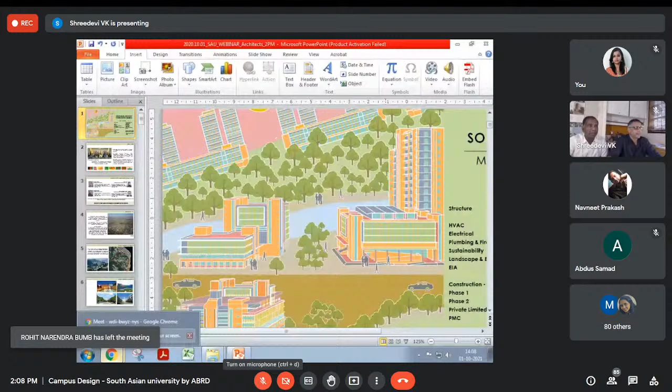Okay, can you all hear us now? Yes, yes, yes sir. Okay, great. Thank you. Good afternoon everybody. Good afternoon students, faculty members, and other guests who are joining online.

So we are here to present a project that we've been working on from 2011 onwards. We'll come to the dashboard as we go along with the presentation. The project is for South Asian University, located in Maidangarhi village in New Delhi.

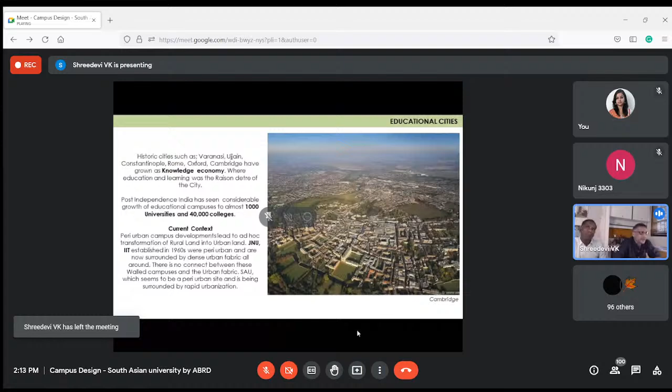We have been in the domain of institutions and educational campuses for almost the last 15 years. We started our practice in 2001. We did the Alliance Française, an educational institution of a different nature. Then we did the National Center for Biological Sciences, another educational-cum-research and development center. And then we came to South Asian University.

It has been acquired learning over the years, where we've been studying institutions and campuses, and we are taking you through some examples of campuses existing around the world to put things in perspective and understand how campuses are located within cities, peri-urban areas, or absolutely rural areas in some cases. Historic cities such as Varanasi, Ujjain, Constantinople, Rome, Oxford, Cambridge were known as knowledge economies, where education and learning was the raison d'être of the city.

Post-independence has seen considerable growth of educational campuses, to almost 1,000 universities and 40,000 colleges in India. We are still way behind what we really need. So this is going to always be a thrust area for our country, because the entire demand for education, particularly higher education, is so much that the sheer numbers will really put a lot of thrust on this sector of educational development.

In terms of context, you'll find all across the world peri-urban campus development leading to ad hoc transformations of rural land into urban land. A case in point is JNU and IIT, established in the 1960s, which were really peri-urban to start with.

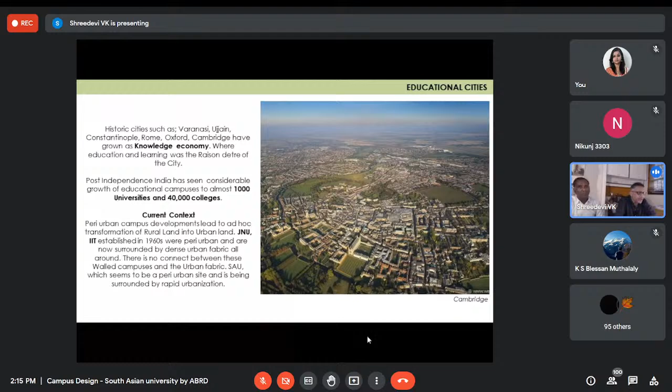But they have now got surrounded by urban fabric all around. One doesn't realize that at some point they were so far outside the city. What's notable is there's no real connect with the rest of the city, and over the years, particularly with security and other concerns, these have become very insulated and isolated campuses.

As a build-up to our project, we went through lots of universities, not only through case studies on the net and literature study, but we also physically visited several universities, particularly in Hong Kong, Shenzhen, and different parts of China.

This was an example of the Chinese University of Hong Kong, which is again located pretty much outside Hong Kong. You see a lot of buildings now, but when it was built in the 60s, it was almost like a verdant green area located on mountain slopes overlooking the sea.

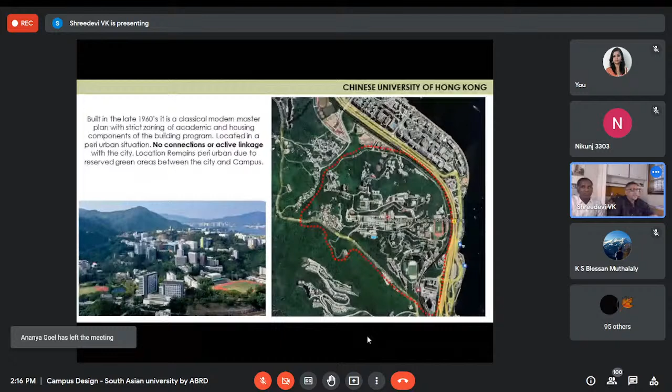The fact that campuses are isolated is not something new to India, but happens all across the country, and indeed all across the world. Even though the landscape here is stunning and you can see across the city, there are no real connections or active linkages with the city.

Some examples of how developments have continued in universities, where you can see modern buildings made in the 60s and 70s on the lower side, and new developments, new typologies and new building materials and building types coming into play over the years.

Another university was Hong Kong University of Science and Technology, again located slightly outside Hong Kong. It was a very interesting campus because it was very compact, located on steep topographical land overlooking the sea. This is the difference between universities where the context is not so scenic versus this one, which had a very strong visual linkage as well as compact development, visible in the built environment on that side.

This is a view of the university from the oceanfront. You can see how it integrates into the sea body. The academic buildings and all the faculties are located on the higher ground profile, while all the housing is on the lower ends of the campus, closer to the port station, the jetty back, etc. It is all located close to the ocean.

Studies of universities also looked at Boston, and all these universities are very different from where they used to be located.

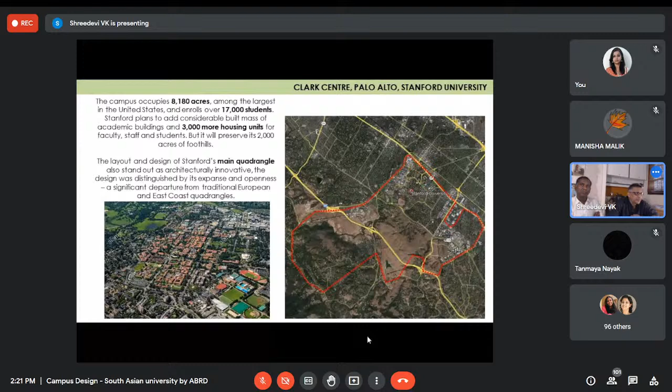That's the main building of Stanford University, the main quadrangle where you enter. You have very classical buildings which were built at least about 125 years back, through a master plan done by Olmsted in 1888.

And on the right, you can see newer development, which continues to redefine the character of the university, and impart to it a new character and a new kind of feel. So one of the projects we looked at in much greater detail when designing the National Center for Biological Sciences was the Science and Engineering Quad.

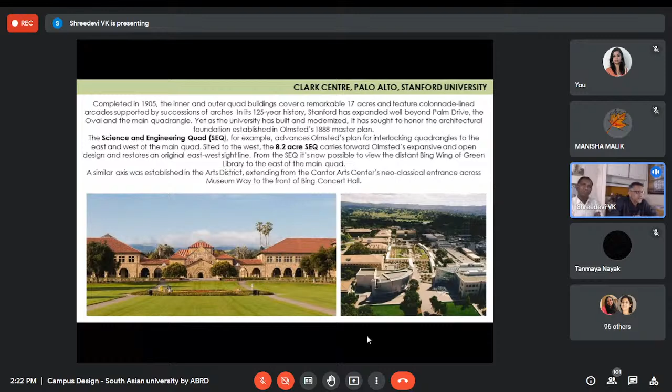The idea of this development was how the university can enhance and focus more on interaction, bringing people together from different parts of a large campus.

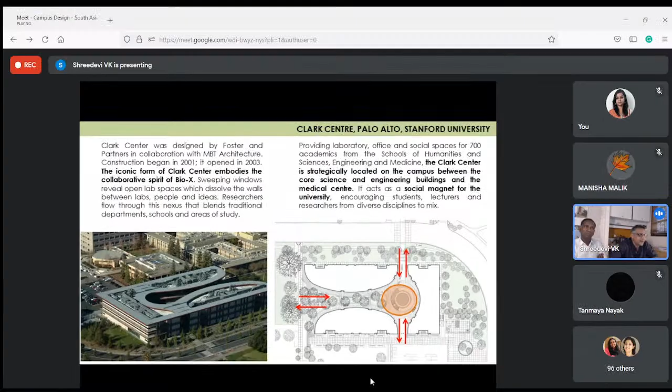This was a building we looked at much in detail, the Clark Center, developed under a program called Bio-X. The whole idea was to make a multidisciplinary hub in the 21st century, where people come together, are able to meet each other, and the research and program that develops here is visible to people moving through the campus.

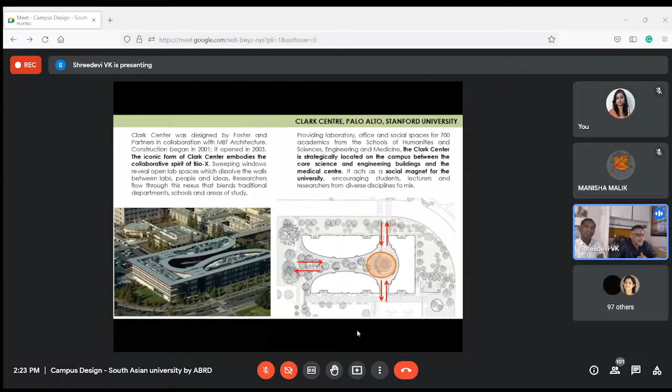You can see the diagram on the right. It shows the entire building is conceived as 3 blocks so that it invites people from all directions, and the central space becomes a space for meeting.

The entire ground floor is an activated space, with a large cafeteria and 2 multidisciplinary laboratories. The idea was that research becomes visible. While you walk through the center, you can see very advanced robotics research in one laboratory, and high-end life sciences research in another. So every person who passes through the building gets to experience what's happening inside.

This is a great example of how they've activated the entire campus through an intervention that's really not very big, but small. The oval shape you see is an open air and underground theater, where supposedly everybody can meet, host events, and have cultural events. This is the kind of thought now really prevalent in university campuses.

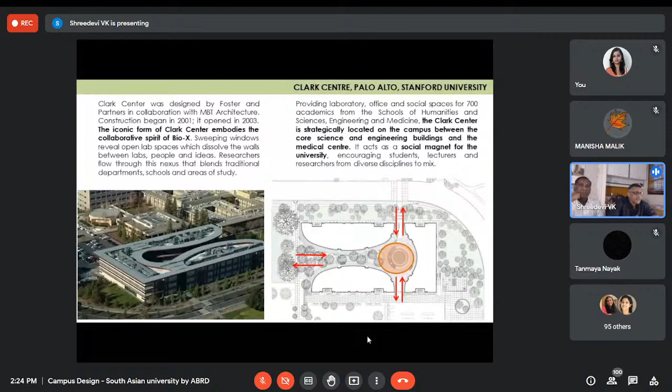It's multidisciplinary research, so you can have a robotics person working with a life sciences person, working with a chemistry person. Everyone is invited to be part of this program and conduct research in a very open and visible environment.

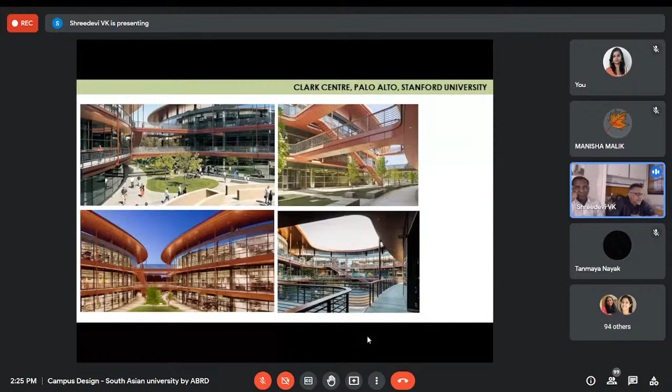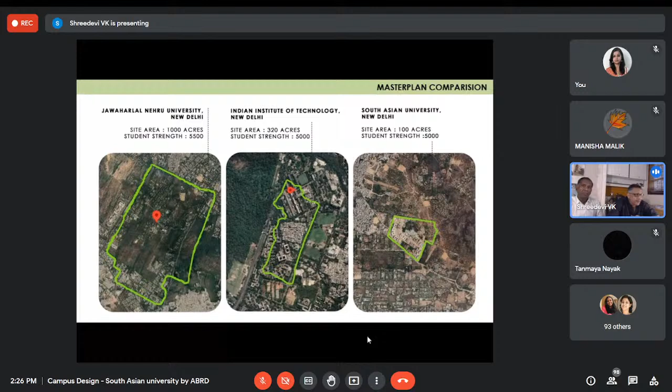Back in the 60s when JNU was developed, it was a 1,000-acre campus envisaged for a student strength of 5,500. Indian Institute of Technology had a site area of 320 acres for 5,000. But South Asian University, on the right, at the same scale, is a 100-acre campus for 5,000 students. So you can see the transition of how densities are being compressed and land is becoming a precious resource, and things are really getting squeezed down.

So Rajesh will take over from here and run you through the entire competition, our concept, and where we are in terms of the project.

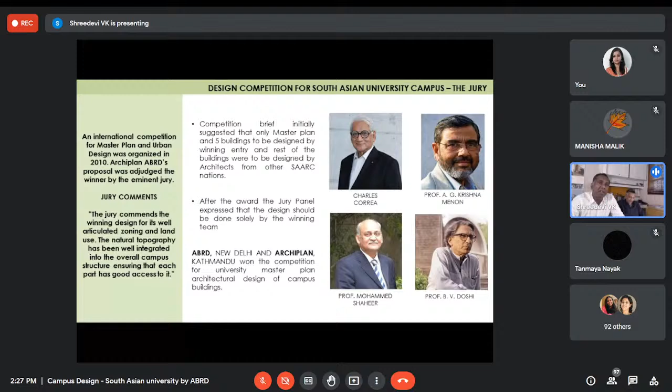The main reason our team got selected, as you can see in the jury comment, was that the jury commended the design on its well-articulated zoning and land use, and appreciated that the natural topography was very well integrated into the university functions and campus structure.

In fact, one of the edges of the sanctuary abuts our site. The edges towards the west and south of our plot are typical houses and a village called Rajpur Khurd. So it was a kind of context we had to imagine for this site, what it would be over the years, and then we responded to those edges.

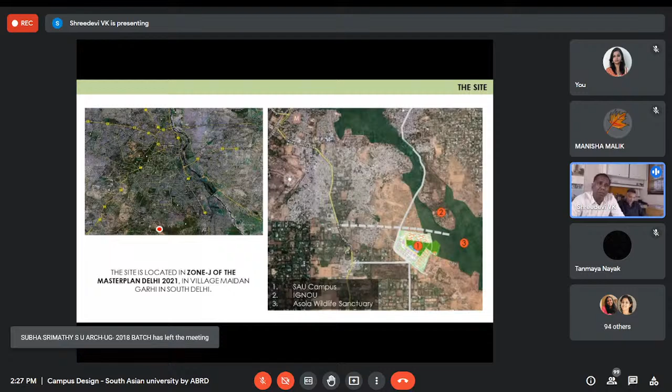Here you can see a close-up map. There is a 100-meter wide master plan road proposed on the northern side of the site. But as we understood during the design process, this road is very unlikely to come up, because it could pass through wildlife areas. The road would extend towards the main road and all around the campus, expanding to a 30-meter width on our southern side, which means a lot of impact on the blocks.

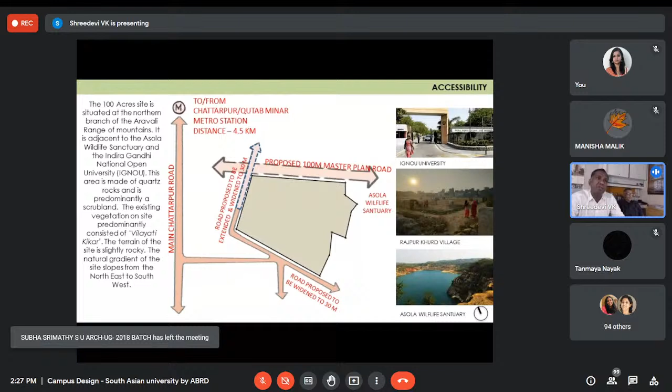Almost 90% of the year's rainfall comes in two months. This leads to conservation of water and very sensitive usage of that water through the rest of the year. This became an important part of our sustainability strategy, reuse of water, and in fact designing the scheme around water channels and drainage patterns became the main determinant of the design.

The second thing we realized was making this design very eco-sensitive and sustainable. Some principles we came up with were to make the built form very dense, which would help us consolidate very large open spaces.

Another thing we realized from traditional South Asian architecture was interconnections and linkages between various functions, and how these connections and linkages lead to creation of different types of vistas, giving users multiple options of circulation.

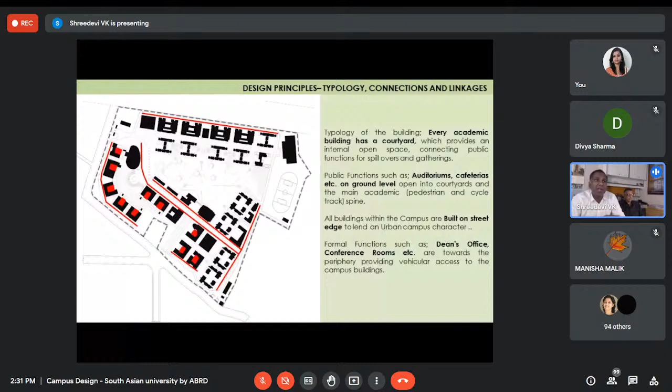Every academic building in our project came up with the idea of a courtyard. This building typology kept repeating because we have almost 14 faculties. Then there were buildings such as auditoriums and cafeterias located at the lower level, which would encourage a lot of public usage and free movement of people from these spaces within the building to the connector spines and to the pedestrian tracks.

One more design principle was that within the campus we kept all the buildings right on the street edge, which lent an urban character to all the buildings in the campus.

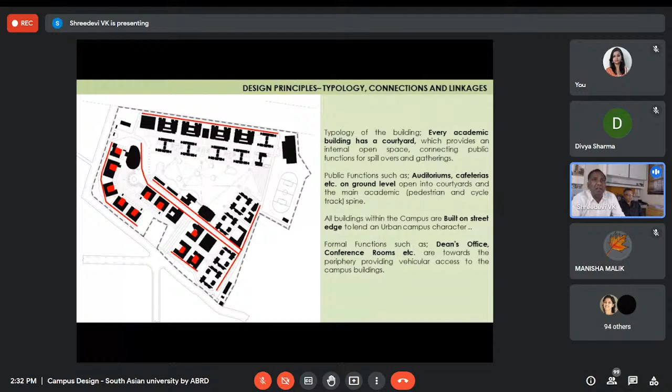Finally, coming to the vocabulary of architecture, we debated a lot and realized it would not be appropriate to follow any style or particular vocabulary. Rather, we kept our building facades, orientations, and fenestration to follow the tenets of climatic considerations.

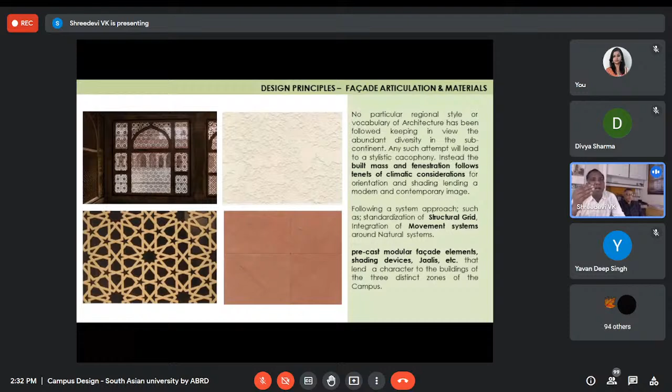The idea here was that the university is a fairly large program, with about 5,000 students living on campus, about 400 faculty houses, and an academic zone.

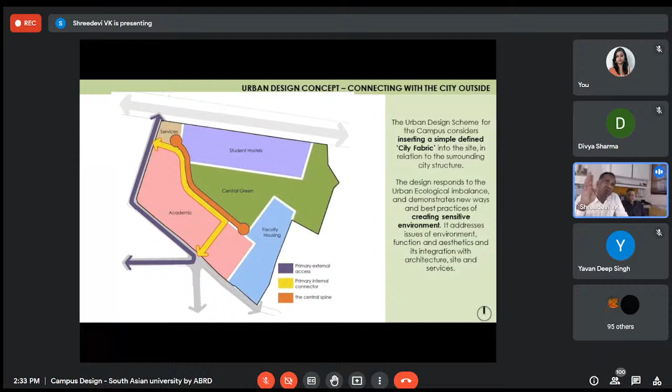As an approach, we created a very large central green, which was continuously linked to the Asola Wildlife Sanctuary on the eastern part of the site.

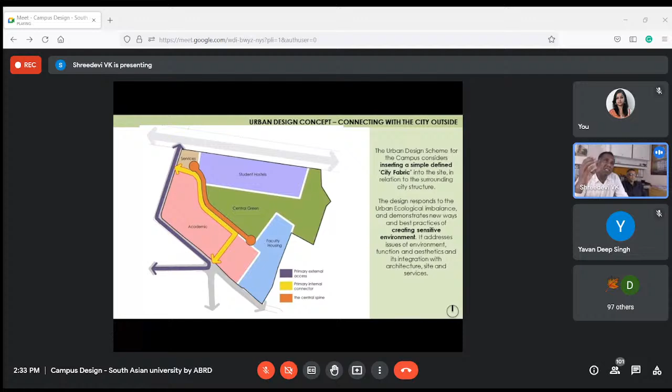The students' hostels were located towards the north, because that is the only area inaccessible to the public front of the city. Another reason for keeping the hostel there was that they would be least disturbed in that zone.

Faculty housing again was located in a part of the site which was not very visible, yet had an independent option of entry and exit. And the pink zone you see is the academic zone, where all the academic and administrative functions of the university were located.

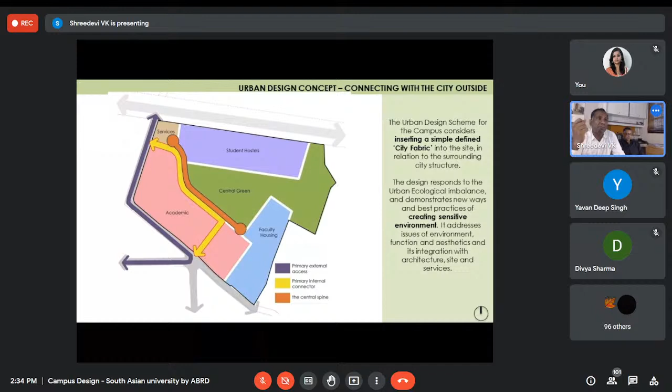Along with that came location of strategically locating our nodal points in each zone. So every hostel building, especially those facing the central green, has a very free-moving ground floor, with public functions like the hostel mess, dining halls, and gymnasium located at ground level. Similarly, in the academic zone, auditoriums and cafeterias are on the ground level. In the housing blocks, housing courtyards allow every housing unit its own intimate environment, opening out onto functions like the club and guest house.

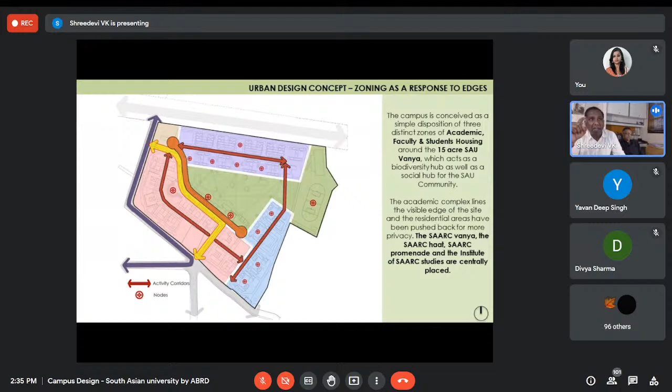Here you can see the bold red line, which is a connector spine between all three zones, and is non-vehicular in nature. The main yellow line is the motorable access way, where we envisage a public transportation vehicle coming into the campus, giving the option of taking a shared taxi or shared auto directly to the nearest metro station from within the campus.

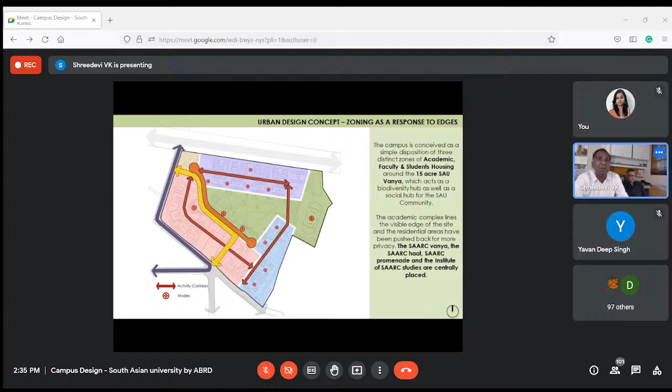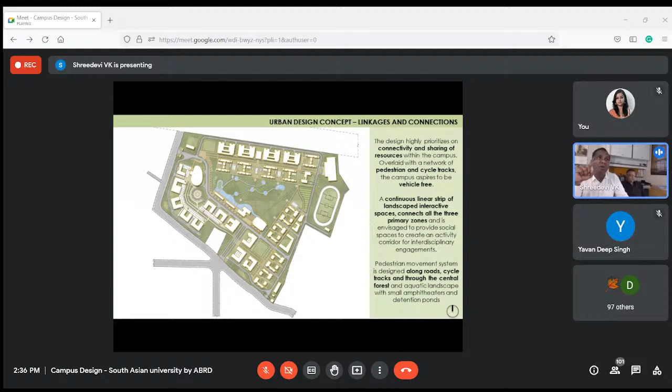So here you see the master plan, which we finally arrived at. It's a very complex web of connections and linkages. Every building or function is accessible by a cycle track, by a pedestrian walkway, and towards the periphery is the vehicular access. There is a continuous linear strip connecting all the buildings together with a pedestrian and cycle track.

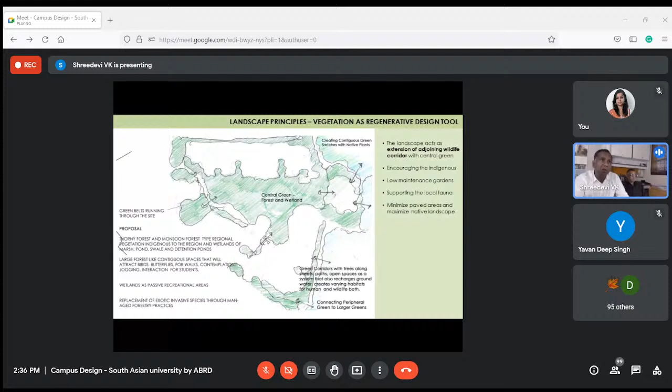These sketches by Akshay Kaul explain the prime determinant in locating the central green in the center of the campus: the hydrology. The highest point of the site is towards the northwest, and we collected all the water through a complex web of drainage channels into a rainwater harvesting pond in the center. As the landscape principle, our green areas came up along with these drainage channels.

The dark green shows where the 15-acre large central green is located, which we named SAU Vanya. The blue is where all the rainwater is going to be collected in the form of a rainwater harvesting pond.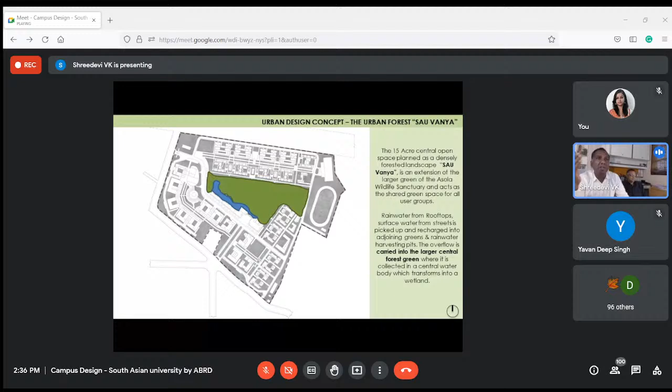These sketches indicate how the rainwater, even the roof water, is collected into rainwater harvesting channels. Instead of making these channels impervious, every rainwater channel is first connected into a small rainwater harvesting pit, and only the overflow of the pit goes into the stormwater drain and finally into the central collection pond. The idea is that a good content of moisture is retained in the ground where the buildings are located or exactly where the water falls. It follows the mantra: catch water where it falls.

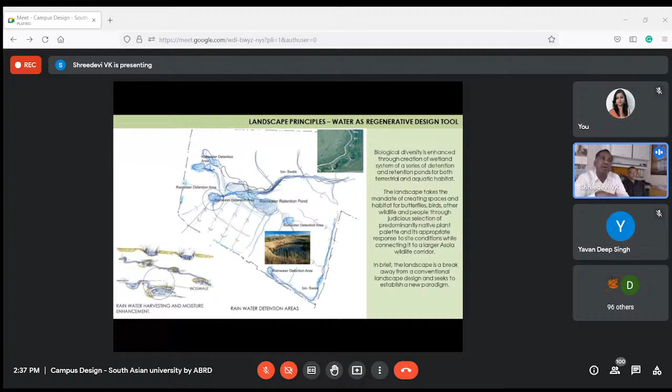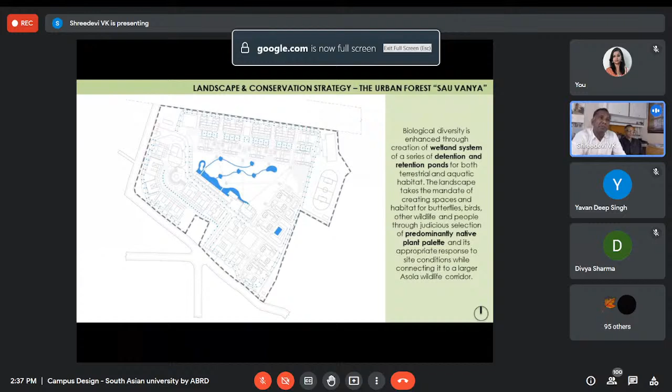So that's the final scheme. All the small blue dots you see are the rainwater harvesting pits we have created. This is a very unique scheme where we are going to have almost 1,000 rainwater harvesting pits throughout the site. We had to get this scheme approved by SDMC, the Jal Board, and many other agencies, and they all commended it as probably the first example of this being followed. Usually the norm is one rainwater harvesting pit per acre, or one tank for every 2 or 3 acres, whereas here we have almost 1,000 of them.

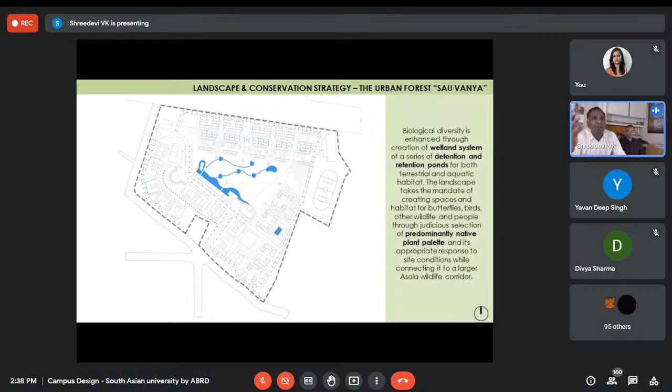These red lines indicate the vehicular circulation, which is towards the periphery. The smaller red lines are traffic that would be very low in movement, because the main roads are also at the back, and the ramp entries into the buildings are towards the back.

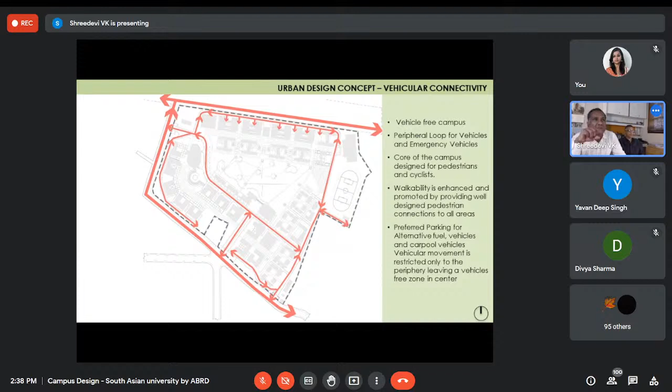These are the pedestrian networks and cycle tracks. You can see there are multiple options. If a student needs to walk from the hostel to an academic building, there is always the option of taking a shortcut through the Sau Vanya, or the option of cycling, shown by the big circular nodes connecting the buildings. Every building entry, especially towards the cycle track, would have cycle parking where they bring their cycles into designated parking lots and then access the building from there.

You can also see on the diagram on the left, the proposal has two-level parking structures proposed, which are within a 3 or 4 minute walking distance from every part of the campus. So in case we run out of parking spaces, the university can take up construction of these multi-level parking structures.

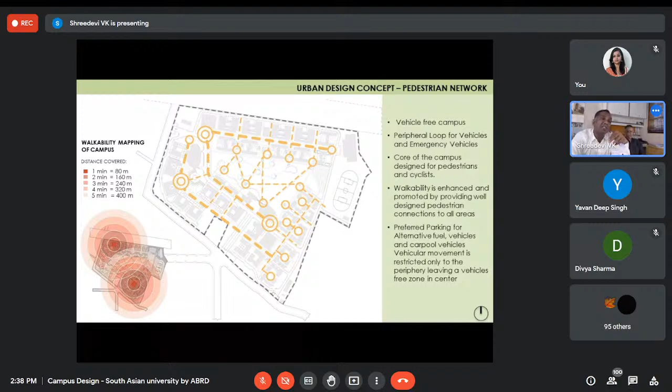The north-south patch is for 4 apartment blocks of 416 apartments for faculty and staff. Towards the east and south are the 12 faculty buildings located.

Apart from these zonings, we also proposed certain activity nodes, which were the major anchor points of the university. Overlooking the rainwater harvesting pond, we proposed the SAARC Haat, which would have eating joints from all 8 SAARC countries, allowing students, faculty, and even city dwellers to come experience the cuisine of South Asian countries. The space between the library and the SAARC Institute was the main SAARC Plaza, a sort of forum for the university, again overlooking the green.

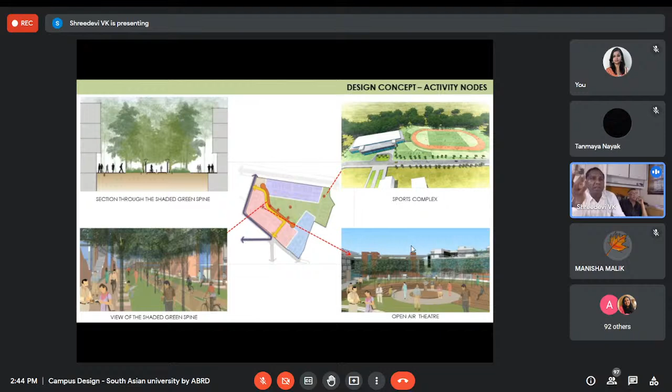So the next few slides will run through some diagrams or sketches we did during the design phase, showing how we arrived at the structure of the master plan.

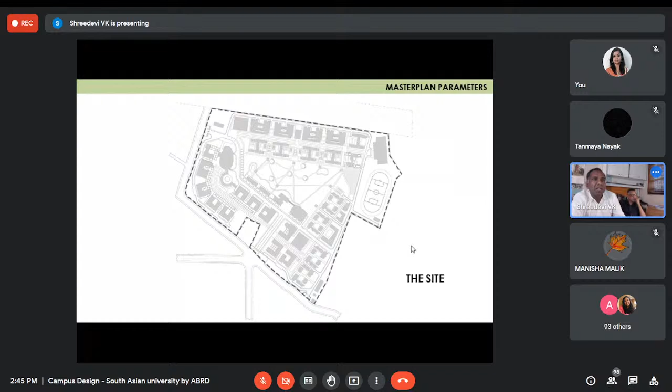The first idea was to locate our water features and how, through a system of swales, bioswales and check dams, to bring them into the central rainwater harvesting collecting lake.

Then came the built form, then the networks and circulations, and the vehicular circulation, which was kept to the periphery of the campus.

Then the plantation layer. Now, as Anupam mentioned, almost 50% of the university project has been completed and put to construction, and that's the academic zone you see.

Out of the 12 faculties, about 7 faculty buildings have already been built, and you see all the housing blocks.

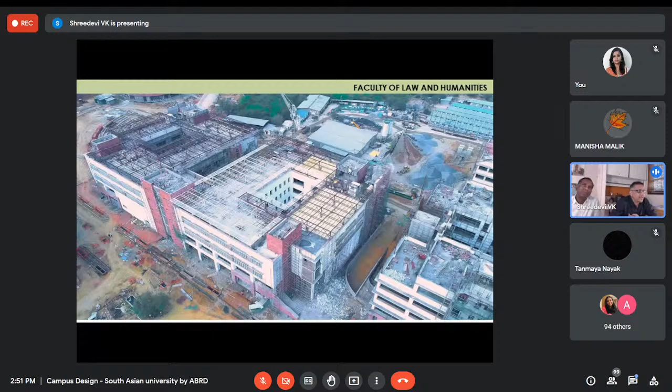Essentially, the idea is that it has a central spine, with hostel type 1 located on the northern edge and hostel type 2 on the southern edge. Hostel type 1 is where the dining halls are located on the ground floor.

The idea is that there are 4 main dining halls, and 5,000 students have the option to choose. From an architect's perspective, our idea was that each dining hall would have a different cuisine from a different region, so people can choose where to eat. We really don't know what it will be once the hostels get built and operationalized.